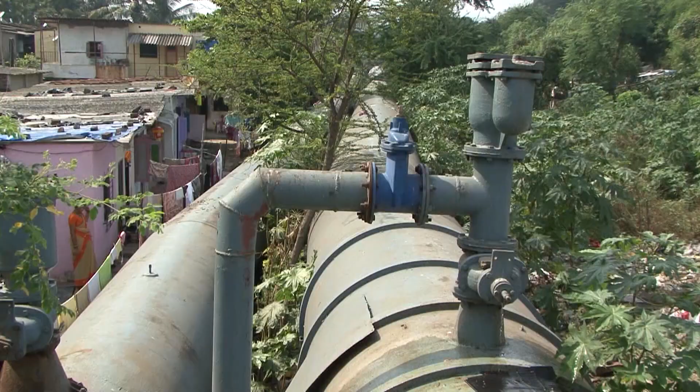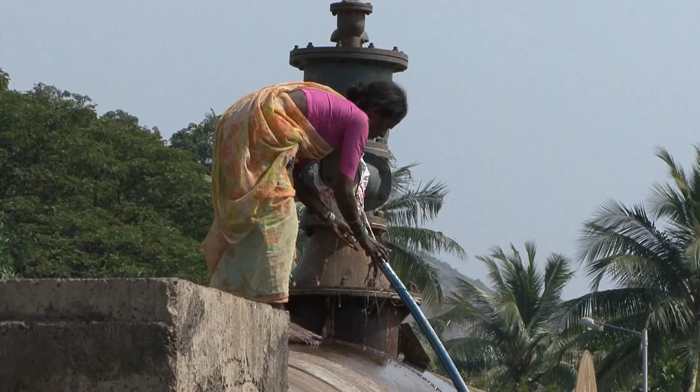The water supply pipes nearly all date back to the English colonial period. Since they were laid some 100 years ago, the population has increased by a factor of 14. The existing water mains have not evolved to meet the changing demands.

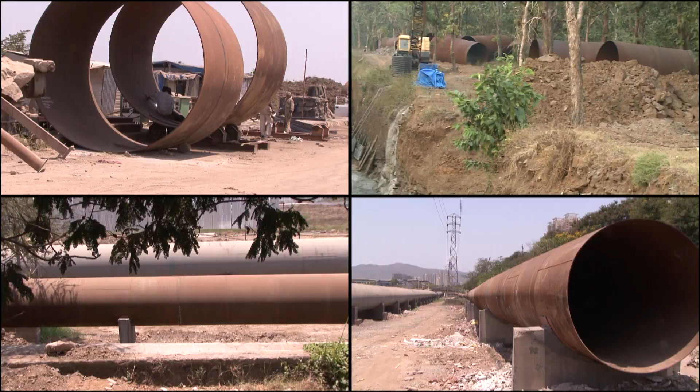Next to the existing old pipelines, a new 70-kilometre-long water main is being constructed with a diameter of 3.5 meters. It will connect the city of Mumbai with the Modak Sagar water reservoir and provide additional drinking water for the population.

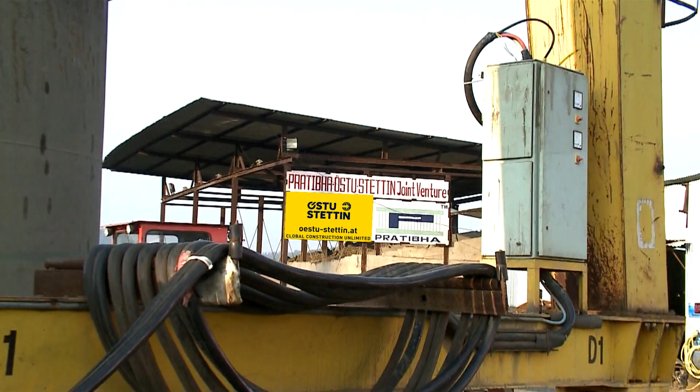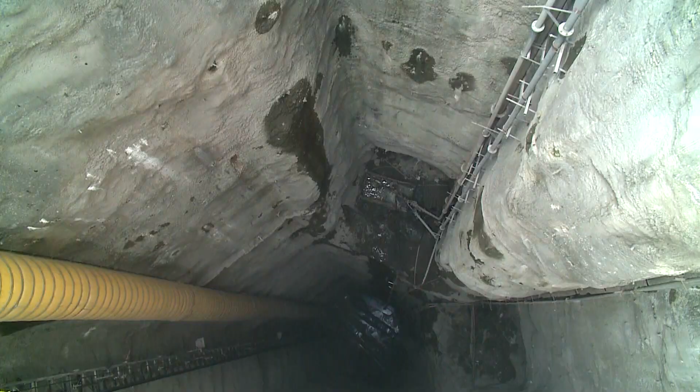ÖSTU-STETTIN specializes in highly challenging international underground projects. The company has a saying: if you want to build high, then you must first dig deep. And this was part of the high motivation when they started the project in 2008.

ÖSTU-STETTIN had already carried out many large-scale international projects. The project in India has been jointly managed in cooperation with a local Indian partner, Pratibha. ÖSTU-STETTIN has, however, been responsible for the technical leadership.

A tunnel 100 meters underground must be constructed for the high-throughput water main. Its starting point is a massive shaft close to the reservoir. This shaft is the hub and key location for the project.

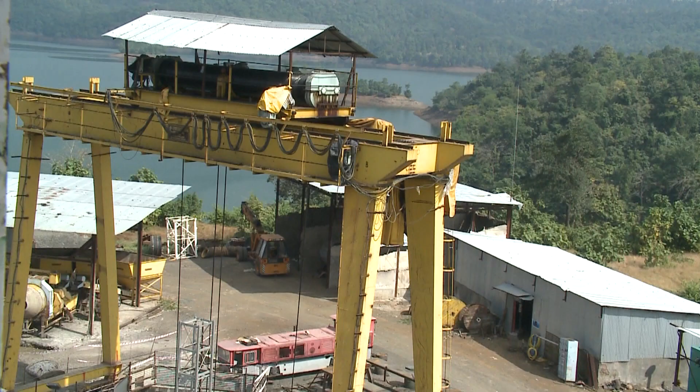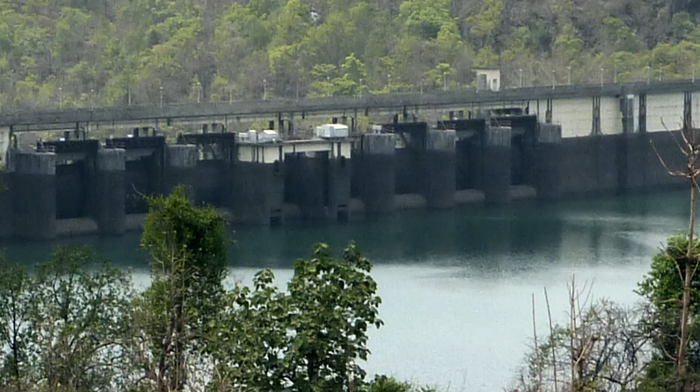The water level of the reservoir varies enormously over the year. In the monsoon season, it collects over 95% of the annual rainwater precipitation. In between, the water level falls on occasions to frighteningly low levels.

The new drinking water pipeline follows these variations in level by drawing water at different depths from the reservoir. Three intake structures are connected together by the shaft, and locks at different levels regulate the intake of water.

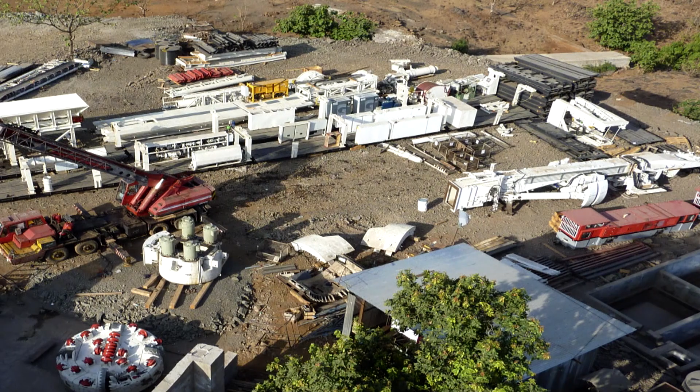The tunnel boring machine had to be transported from Austria via sea route to India. Piece by piece, it is lowered down the shaft so that work on the tunnel 100 meters below can start.

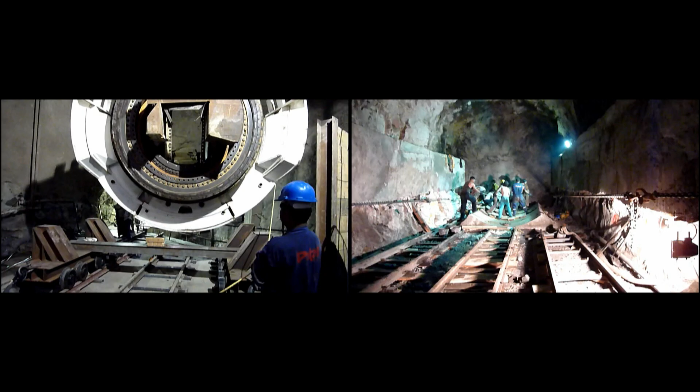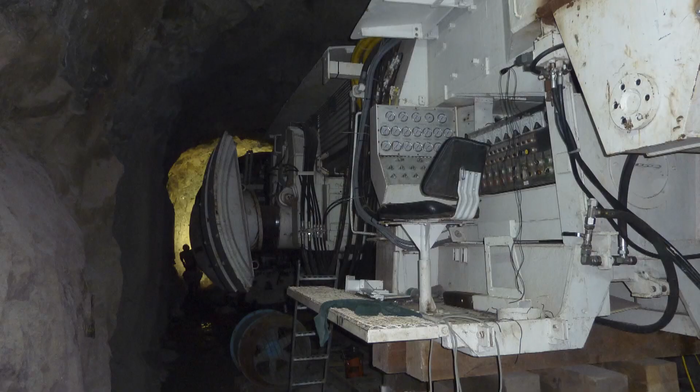That is a Robbins open-design tunnel boring machine, with a cutter head with disc cutters and an overall diameter of 4.1 meters. The complete machine, including the cutter head and the trailer, measures about 250 meters in length.

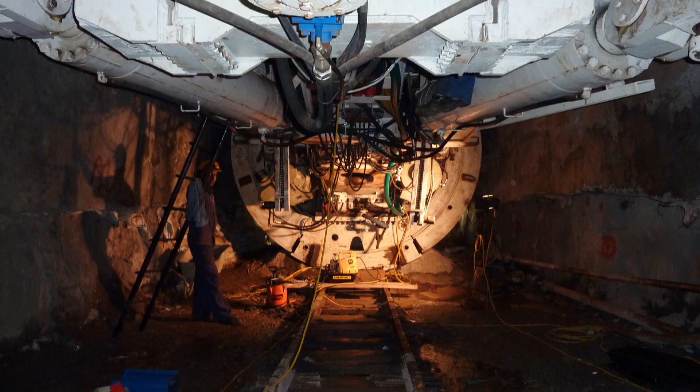To the rear is the gripper, which pushes against the tunnel walls and allows the propel cylinders to extend and move the whole machine forward. The huge machine measures an incredible 250 meters in length.

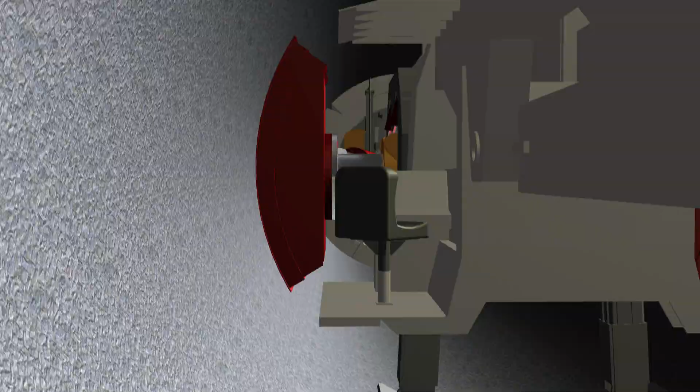The attached trailer unit is like a small factory. In addition to the main hydraulics and storage tanks, it carries transformers, air supply systems, and a range of supplies for mining. The hydraulic pumps work at pressure up to 300 bar.

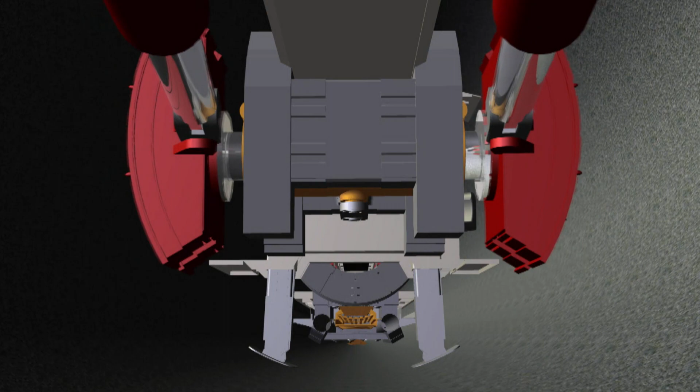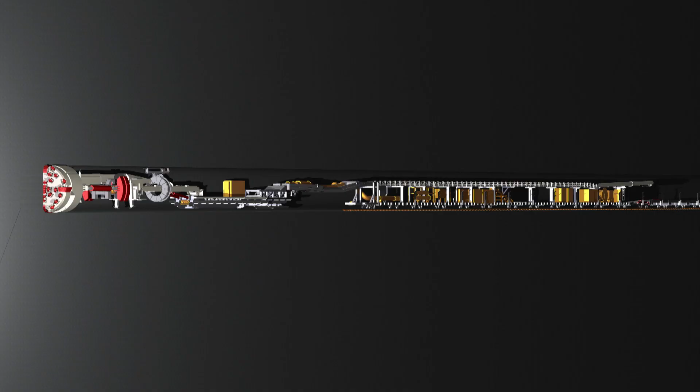Electrical compressors produce compressed air which, among other necessary operations, is used to apply sprayed concrete onto the walls of the tunnel. The tunnel boring machine left the shaft behind well over a year ago. Meter for meter, it has carved its way through hard rock, carrying the tunnel forward over 4.5 kilometers.

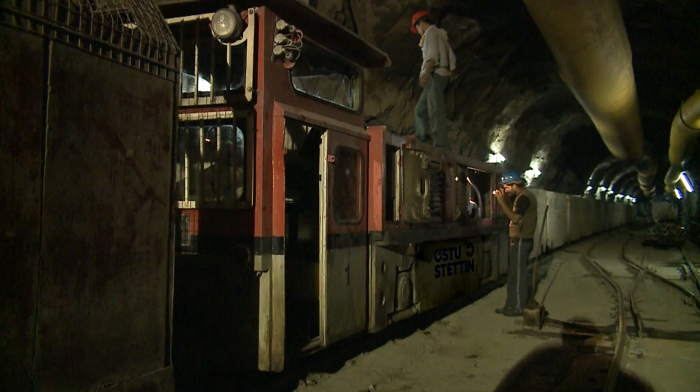Two kilometers of solid mountain still lie ahead. A diesel locomotive now runs between the shaft and the boring head, synchronized with the boring cycles to bring supplies and remove waste.

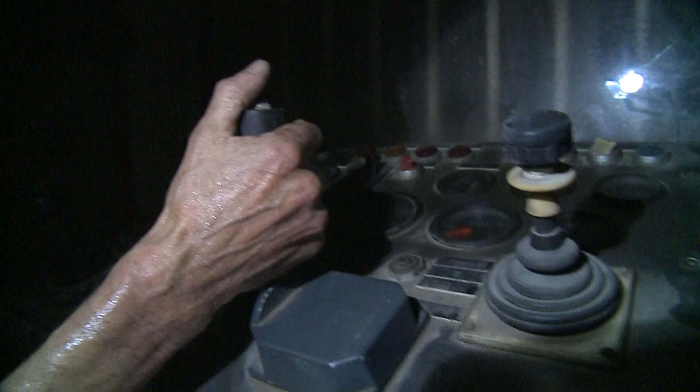The climate inside the mountain puts a heavy load on man and machine. The combination of heat and high humidity is hard to bear, especially for Europeans. The thermometer never drops below 45 degrees centigrade. Added to this is the continual pressure to keep the project on time and in budget.

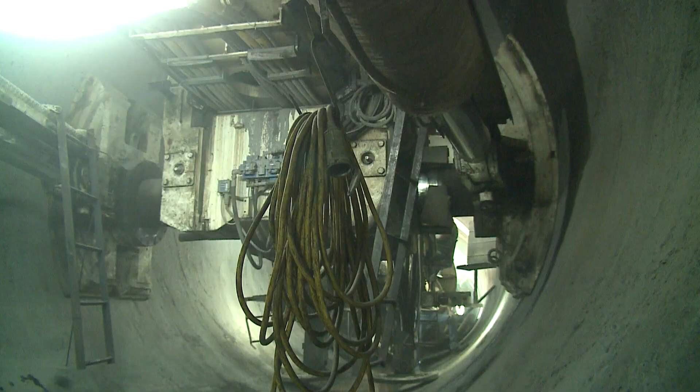A burdensome byproduct of this whole process is the enormous amount of heat generated. Within 10 meters of the actual cutter head, the ambient temperature rises to above 52 degrees centigrade.

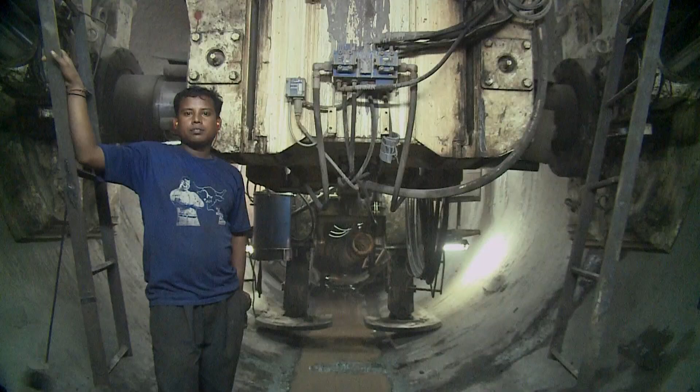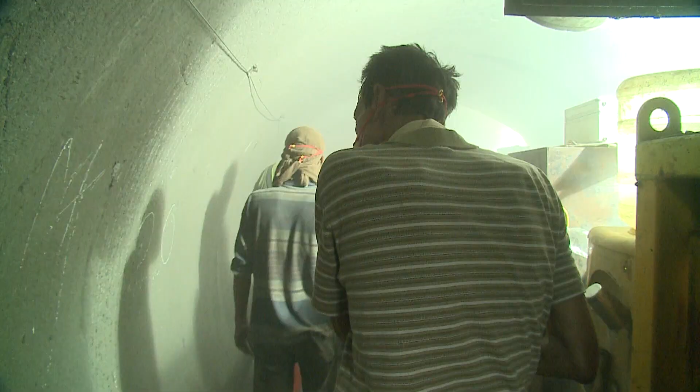The fresh air blown in from the surface is absolutely necessary here, even if it does little to promote cooling. A further problem is the enormous amount of dust created. The level of noise, heat, humidity, and dust at the rock face is almost unbearable.

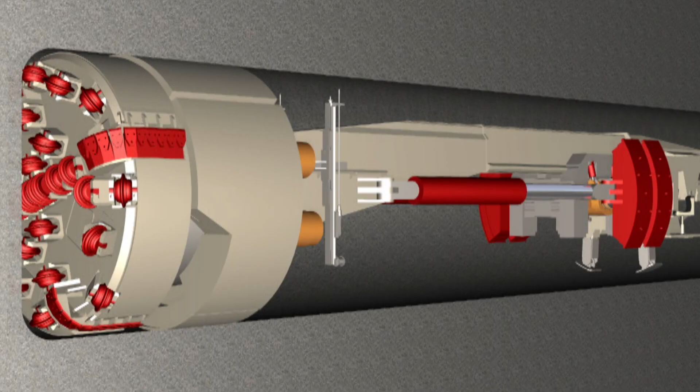With every turn of the cutter head, the tungsten carbide disc cutters bite deeper into the rock. The circular face of the cutter head is 4.1 meters in diameter and is fitted with 28 disc cutters, each working with a force of 20 tons on the hard rock.

With this project, they have to cope with particularly hard basalt rock. Under such extremes of pressure, the cutters throw out pieces of rock the size of a fist.

In order for the machine to hold itself stable, it is braced by grippers against the tunnel wall. From this fixed position, the powerful forward propel cylinders push the cutter head against the hard rock face with a force of up to 700 tons.

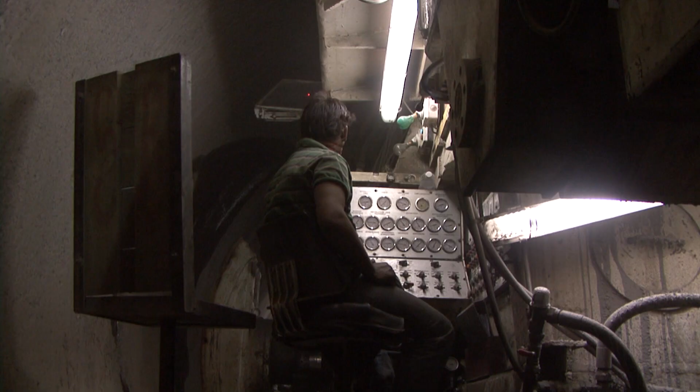The machine is guided through the mountain by the latest measurement technology. Orientation underground is enabled using data collected by geological surveyors. A laser-targeted steering system holds the boring machine precisely on course.

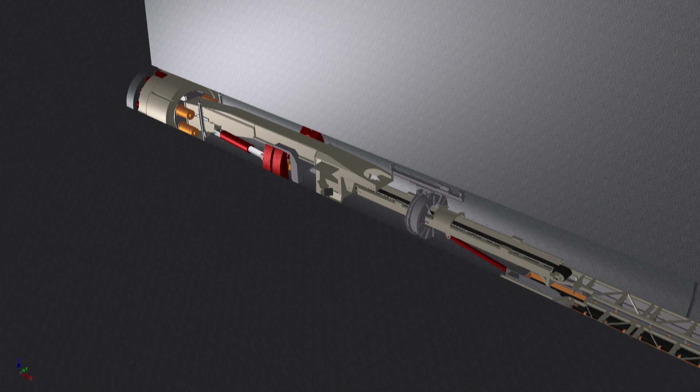This is the only orientation instrument the operator has at his disposal. Nevertheless, the complex target system ensures that breakthrough occurs exactly on target and according to plan.

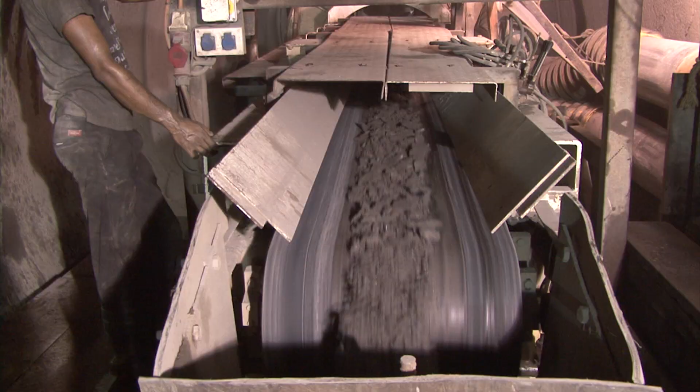Buckets in the rotating cutter head scoop up the rock waste from the floor of the tunnel and deposit it onto a belt conveyor. The belt conveyor transports the excavated rock directly to the transfer point, where waste material is loaded into waiting wagons.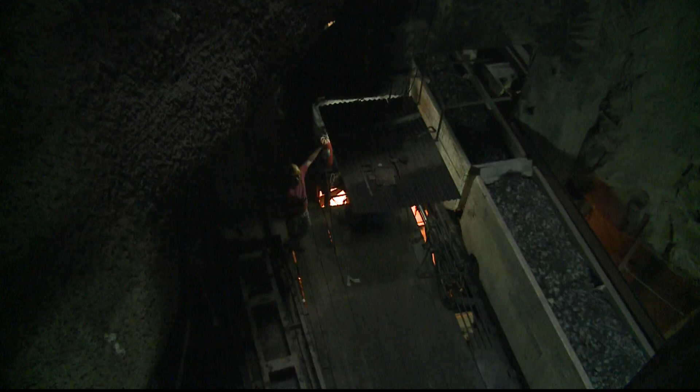On a regular cycle, the diesel locomotive pulls a set of 15 wagons between the tunnel face and the shaft opening. The train arrives at the hopper at the base of the shaft loaded with 150 tons of excavated material. Each wagon holds 5 cubic meters of material.

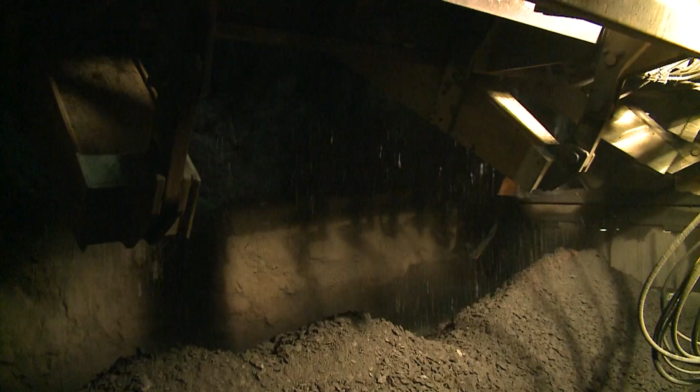The apron feeder was developed by ÖSTU-STETTIN and has already proven itself in 18 months of continuous operation without a single breakdown. It works reliably under extreme environmental conditions.

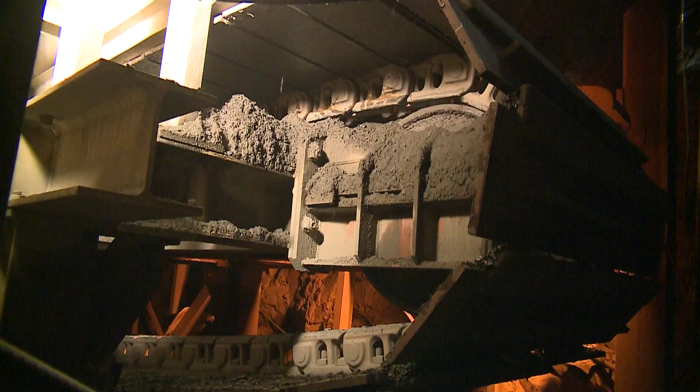Ton after ton, it conveys excavated material from the hopper and loads it into the buckets, huge containers each with a capacity of 15 cubic meters.

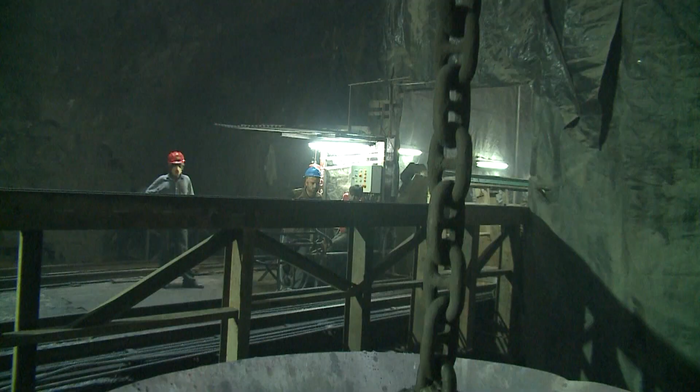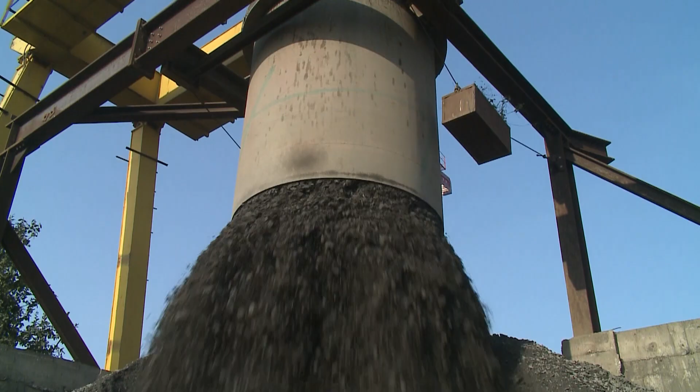A powerful gantry crane lifts the oversized buckets from 100 meters below up into the daylight. At the surface, the bucket discharges its contents directly next to the shaft.

Checks are made at regular intervals by the site management from ÖSTU-STETTIN to monitor progress at the construction site and ensure the status of the technical equipment.

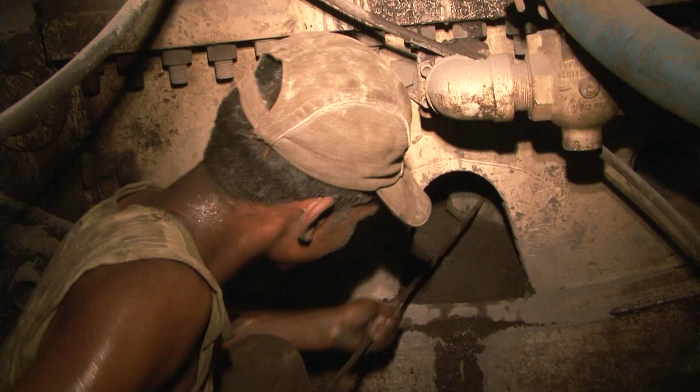Here, the work is continuous 24 hours a day, 7 days a week, all year round. Shift teams change over every 12 hours.

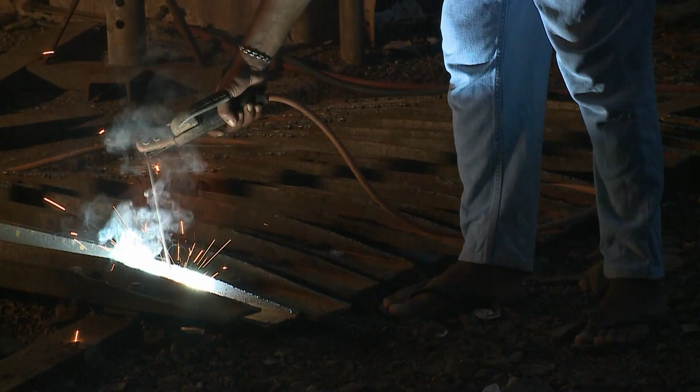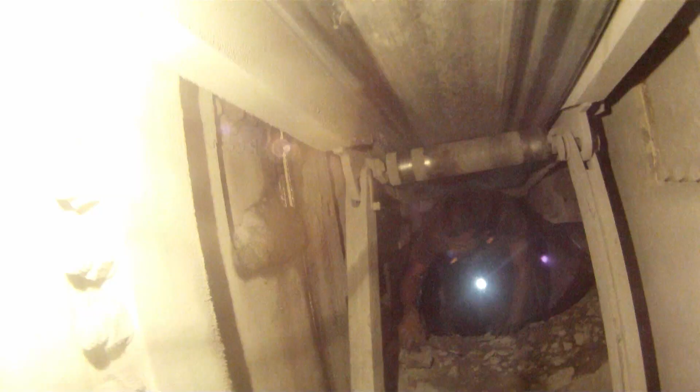The project is complicated by certain cultural differences, but more particularly by the harsh working conditions underground, the dust and the enormous heat, sometimes above 60 degrees centigrade.

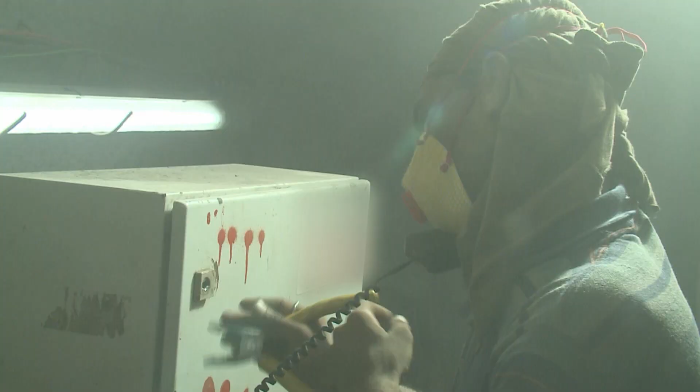The 28 disc cutters on the 4-meter diameter cutter head have been working for 1.5 years, and the underground power plant has been moving meter for meter towards its goal, 7 days a week without a break.

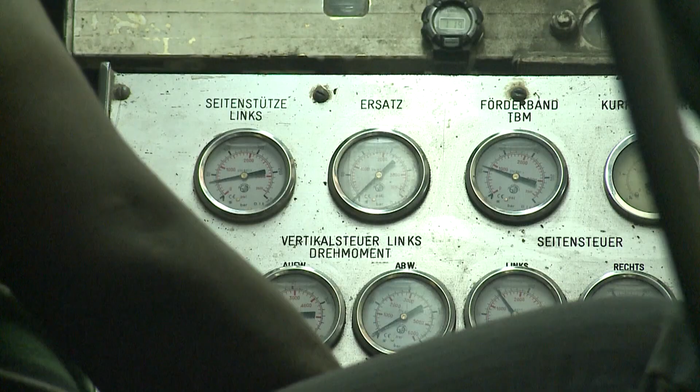The piece of high-tech equipment, 250 meters long, has chewed its way through the rock with great effort, but always with total reliability. By April 2011, the time has come.

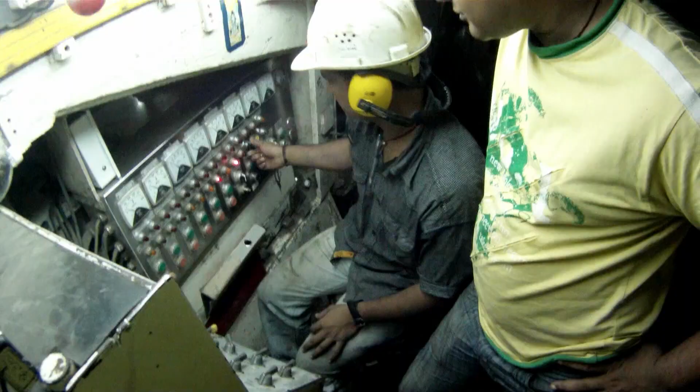The breakthrough at the last rock face occurred exactly on time and at the right place. The joy at the successful completion of the project was immense for everybody involved. As the last wall of dividing rock fell, the jubilation was ecstatic.

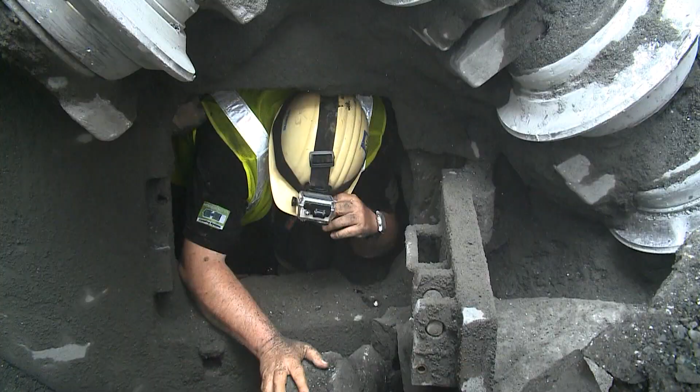Through tremendous efforts of people and technology, the goal has finally been achieved: a secure water supply for the growing city and quality of life for millions.